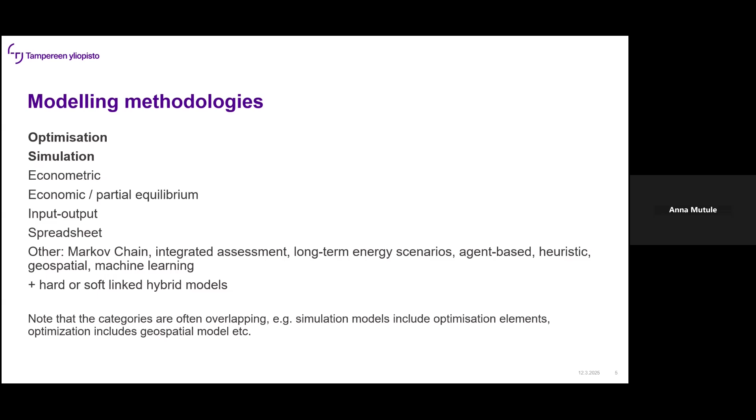If we look at energy system modeling from the purpose perspective, optimization models are typically used to explore a range of scenarios. Their purpose is to present possible system evolution without estimating likelihood. Those models can also take a normative approach, meaning they define systems that can only be achieved through specific actions, essentially seeking a target state.

On the other hand, simulation models are commonly applied in forecasting. Their role is primarily predictive, aiming to represent how the system behaves under given conditions.

Explorative scenarios explore what may happen by analyzing multiple possible futures. Normative scenarios define what future we want, focusing on desirable outcomes and gaps to be bridged. And predictive scenarios estimate what future we expect, including a range from best case to worst case outcomes.

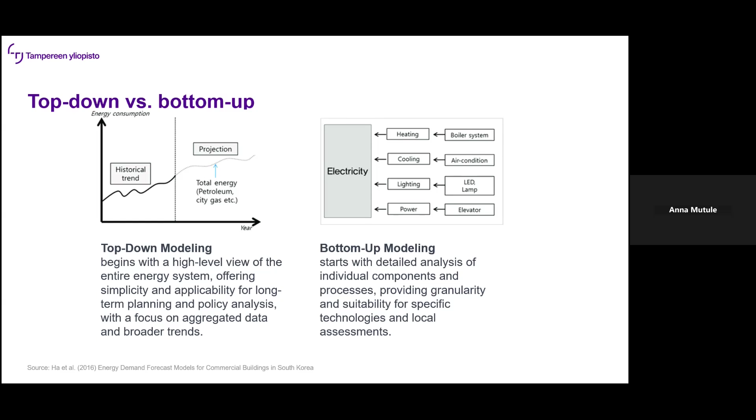On the other hand, bottom-up modeling starts from a more detailed perspective, analyzing individual components and processes. It provides a higher level of granularity and understanding, making it more suitable for evaluating specific technologies or conducting local assessments. This approach considers detailed factors such as heating systems, air conditioning, and lighting to provide precise energy demand estimations. The choice between top-down and bottom-up modeling depends on the objective of the study.

Those subsystems interact to balance energy demand and supply across different sectors. Energy consumption and generation are influenced by various end user sectors, including industry, transport, buildings, and also renewable resources such as wind or solar. Each sector has specific processes and dynamics, such as industrial processes, transport mobility, and the hydrological cycle, for instance hydropower. This approach highlights the importance of cross-sectoral modeling to achieve a holistic understanding of the energy system and improve decision-making for sustainable energy transition. So it is important to cover various sectors in energy modeling.

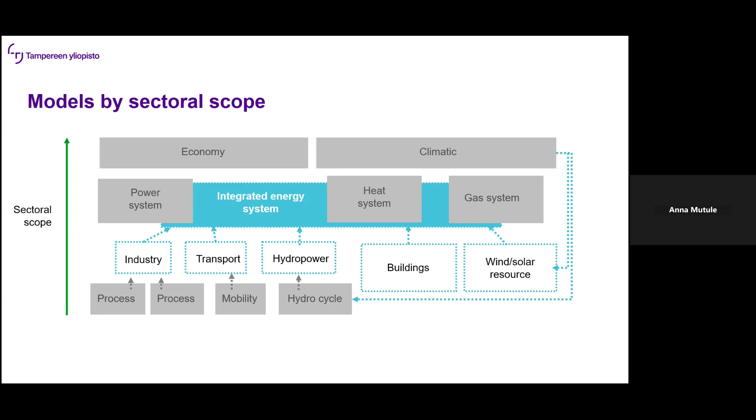In an integrated energy system, the key challenge is to continuously balance supply and demand in real time. This requires a coordinated approach across multiple energy sectors, infrastructure, and consumption sectors.

A critical aspect of this process is the cost-optimal dispatch of generation units. This involves making strategic decisions on the optimal use of energy storage, interconnectors, and demand response mechanisms, while considering technical constraints, market conditions, and regulatory frameworks. Additionally, the planning of the energy system focuses on identifying optimal investment strategies under uncertain future conditions.

With increasing system complexity and sectoral interdependencies, it becomes essential to simultaneously consider multiple energy sectors, ensuring efficient operation and long-term sustainability. By integrating different energy carriers, such as electricity, heat, and gas, along with various generation techniques, storage solutions, and demand side measures, optimization models enable decision makers to develop resilient, cost-effective, and sustainable energy systems.

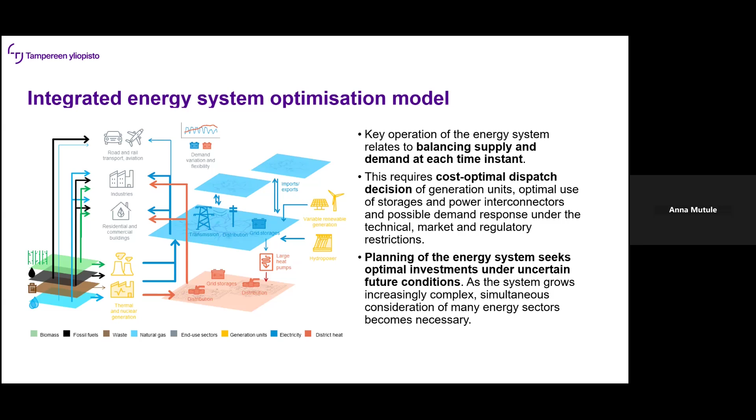More detailed spatial resolution helps capture transmission constraints, regional variations in resources, and infrastructure dependencies. The level of techno-economic detail also varies. Simpler models may use linear aggregation to represent power plants, while more advanced models incorporate dynamic startup cost, efficiency variation, and storage interaction. High resolution in this domain improves the accuracy of economic and technical feasibility assessment.

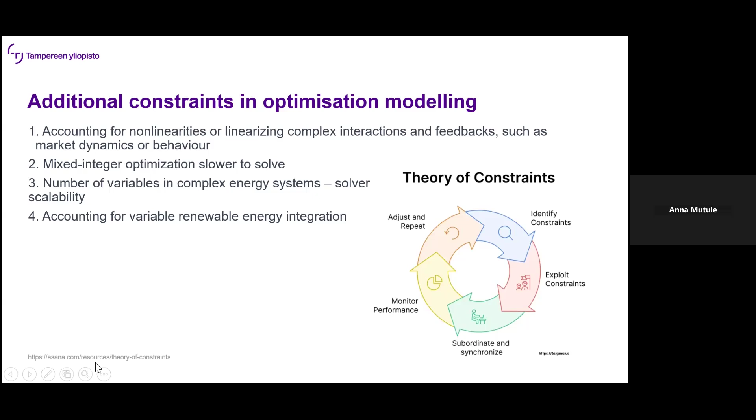Just to summarize the difference between optimization and simulation models: optimization models are designed to find the optimal solution for a specific objective, for instance cost minimization. They are highly efficient for well-defined problems and can handle large-scale systems, even under uncertainty. Those models are commonly used for investment planning, dispatch optimization, and infrastructure expansion strategies.

However, there are some limitations. Optimization models rely on assumptions and simplifications, which may not fully capture the complexity of real-world systems. The optimization model's effectiveness is highly sensitive to input data and model parameters.

Simulation models, on the other hand, are used to analyze dynamic system behavior over time. They can represent complex interactions and feedback loops, making them particularly useful for policy impact analysis, behavioral studies, and technological adoption assessment - meaning new technology inclusion in the generation portfolio of a country.

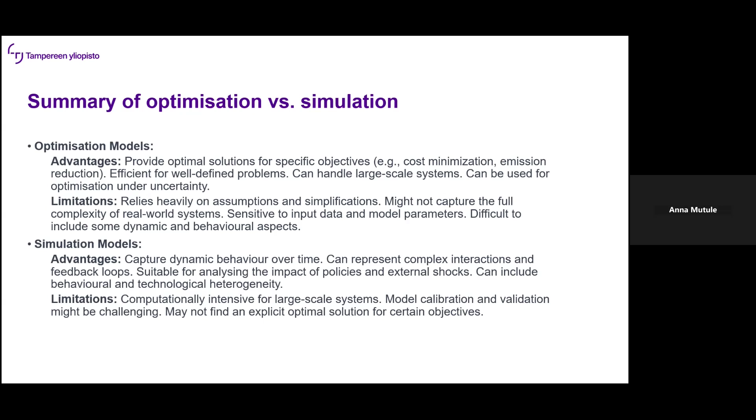However, simulation models can be computationally intensive, especially when applied to large-scale energy systems. Model calibration and validation can also be very challenging to carry out for a simulation model by the end. The choice between those approaches depends on the specific objective of the study, the data available, and the computational resources at hand.

With advancements in computing technologies and the evolving needs of various stakeholders, a wide range of modeling tools have been developed to analyze energy flows, evaluate technology adoption, assess policy impact, and so on. In the following slides, we will introduce key energy system modeling tools and highlight their core functionalities and applications.

I will start with the tools for large-scale power system planning. I also need to mention that those tools are commercial, but at the same time widely used to optimize operation, expansion, and market interaction.

For instance, the Plexos tool is used by the European Commission, by the Joint Research Centre of the European Commission, and they rely heavily on this tool. Going into details, Plexos is an advanced energy market simulation and optimization software developed by Energy Exemplar in 1999. It is used for system planning and operational optimization across electricity, gas, and water sectors.

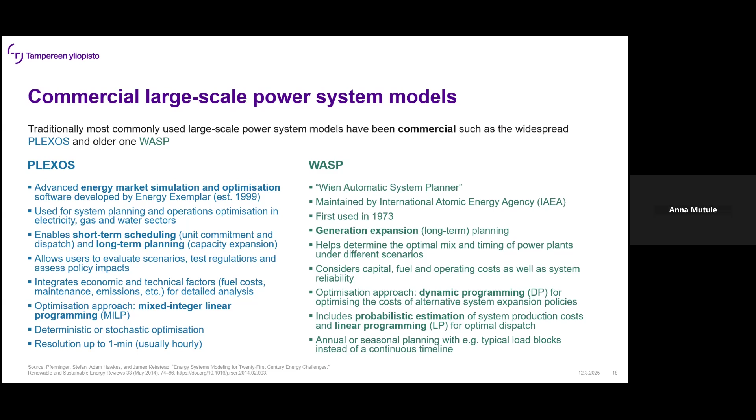But as you know, it's not a new approach, it's already been around for some time, and it's been advertised, let's say, by the European Commission. Energy system modeling is a very complex process with many stakeholders involved, and it's a multidisciplinary approach.

That's why sometimes it's even easier to use a kind of open approach. In recent years, there has been a growing trend towards openness and transparency in energy modeling. Open source tools and open data contribute to improving scientific quality by enhancing transparency and collaboration.

This shift is helping researchers, policymakers, and industry professionals develop more accessible energy models. One key initiative in this movement is the Open Energy Modelling Initiative, which fosters an active community, including an online forum where experts discuss methodologies and share insights, results, and other ideas. If you are really interested in energy system modeling, I suggest you join this community.

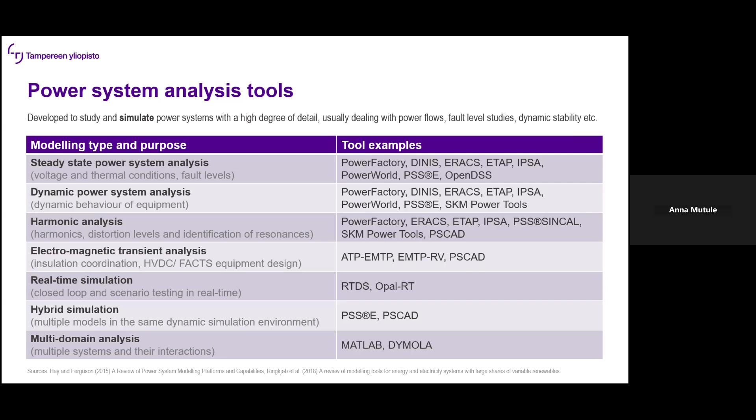Okay, this is all from my side. Sorry for my voice.

Then, Henrik, I give the floor to you to start the video for the SpineOpt model. The first is a very short introduction from the web page of the MOPO project, and another is a more detailed explanation of SpineOpt. Thank you very much.

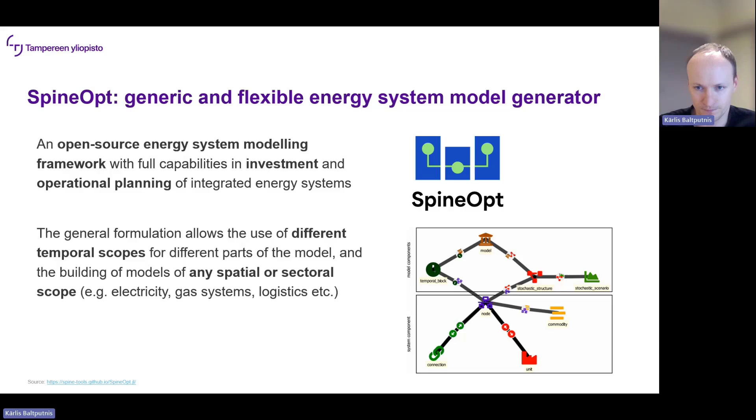The inception of SpineOpt stems from the need to overcome limitations in traditional energy modeling tools. Between 2017 and 2021, the European Union's Horizon 2020 program funded the SPINE project, laying the groundwork for SpineOpt. This initiative emphasized creating open source tools that promote flexibility and integration across various energy sectors.

Building upon this foundation, the MOPO project was launched to enhance SpineOpt's capabilities further. The currently ongoing MOPO focuses on developing repeatable and configurable data pipelines, which streamline data management processes and improve the overall user experience, making the tool more accessible to a broader range of users.

SpineOpt offers several significant advantages. First, flexibility in modeling. It accommodates complex systems with diverse technologies and interactions, allowing for detailed representations of real-world scenarios.

Second, thanks to the adaptable temporal and spatial resolution, users can customize their models to specific research questions or policy analyses by adjusting temporal, spatial, or even stochastic structures as necessary.

Integration across sectors is another strength, wherein SpineOpt enables the modeling of multiple sectors, such as electricity, heating, and transport within a single model, facilitating comprehensive analysis of sector coupling strategies.

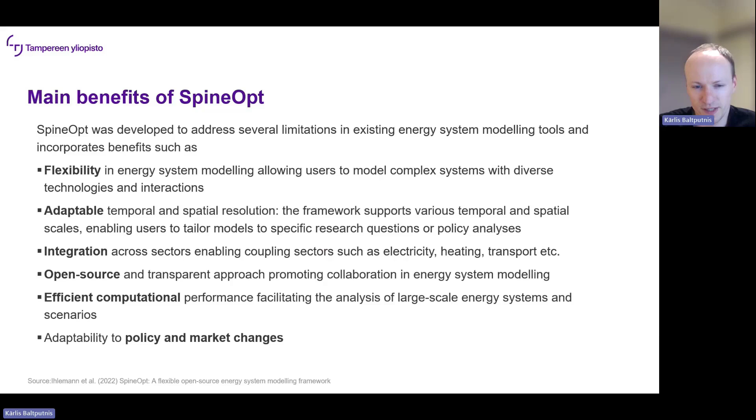And finally, adaptability to policy and market changes, meaning that the framework's flexibility allows its users to quickly adapt to evolving policy frameworks and market conditions, ensuring that analyses can remain relevant in ever-changing regulatory environments.

SpineOpt's unique architecture enables several key features, such as solving the investment master problem with operational subproblems. This hierarchical structure allows for the simultaneous consideration of long-term investment decisions and short-term operational strategies, ensuring cohesive planning.

Then the priorly mentioned flexible temporal and stochastic structures, wherein the framework supports various temporal resolutions and can incorporate stochastic considerations, enabling robust scenario analyses that account for uncertainties in factors like renewable energy production, demand fluctuations, and other non-deterministic factors.

And another key quality of SpineOpt is that it can represent different energy carriers, their conversion technologies, as well as energy storage options, providing a holistic view of the energy landscape.

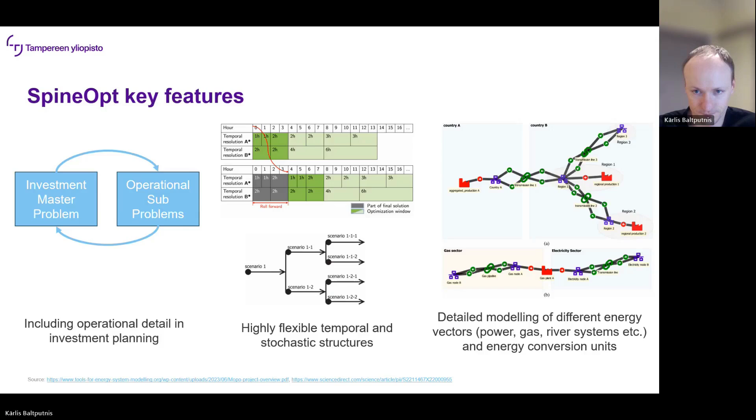At the core of SpineOpt is an objective function designed to minimize total system costs. This comprehensive function includes various cost components which are relevant for the investment planning and/or operational optimization problems.

The investment costs are expenses related to building new infrastructure, such as power plants, transmission lines, or storage facilities. Fixed and variable operation and maintenance costs are ongoing expenses required to keep the energy system operational, including routine maintenance and operational activities.

Then fuel costs are expenditures on fuel sources necessary for energy production. For combustion units, these are often enough the main cost component, which makes up the marginal cost of a generation unit.

Then startup and shutdown costs are associated with initiating or halting the operation of energy units, which can be significant in systems with variable renewable energy sources, forcing thermal units to operate more flexibly.

There are a number of other cost components that make up the objective function, but for instance, renewable curtailment costs, which are penalties or costs incurred when renewable energy generation exceeds demand or system capacity, leading to wasted potential, and others, which can be read up more in the online documentation.

It is important to note that the objective function as well as the constraints are dynamically formulated during model execution, tailoring to the specific structure and parameters of the model. So, depending on the information provided, SpineOpt solves the problem using linear programming or mixed integer linear programming, ensuring computational efficiency and accuracy.

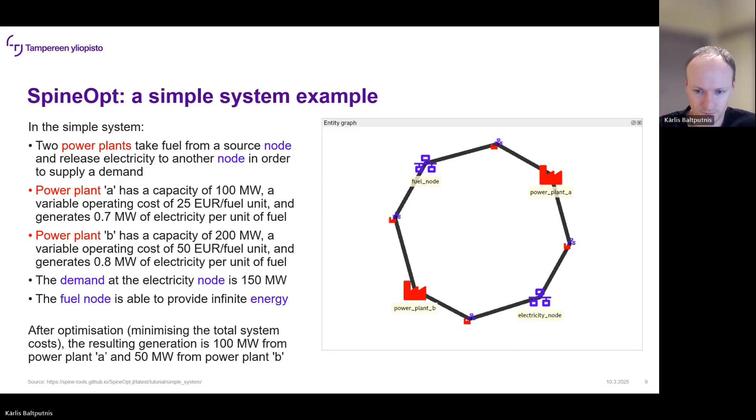In terms of inequality constraints, we have the flow of electricity from the units being between 0 and the respective maximum capacity, and the equality constraint is the nodal balance in the electricity node, wherein the injection to it from the power plants must be equal to demand. In other words, to the withdrawal from it.

By solving this optimization problem, SpineOpt determines that the cost-minimizing solution is to operate power plant A at its full capacity of 100 megawatt in this hour, and power plant B at 50 megawatt. This allocation meets the total demand of 150 megawatt at the lowest possible operational cost.

This also makes sense intuitively, as power plant A altogether provides cheaper power, but its capacity is insufficient to meet the whole demand. This example showcases SpineOpt's ability to model and optimize energy systems. Despite its simplicity, the model captures essential aspects of operational planning, including capacity limitations, efficiency rates, and cost minimization.

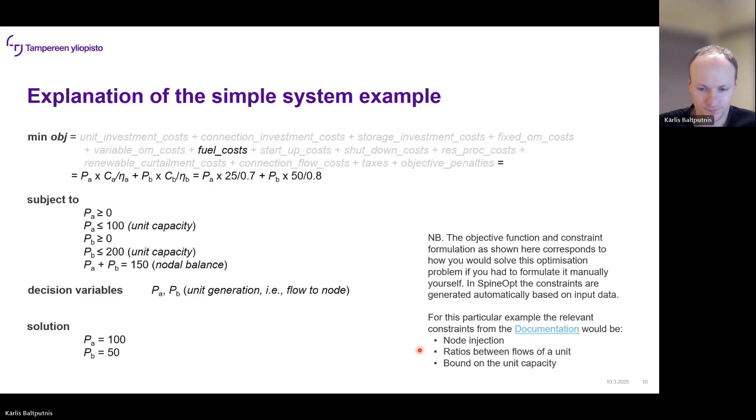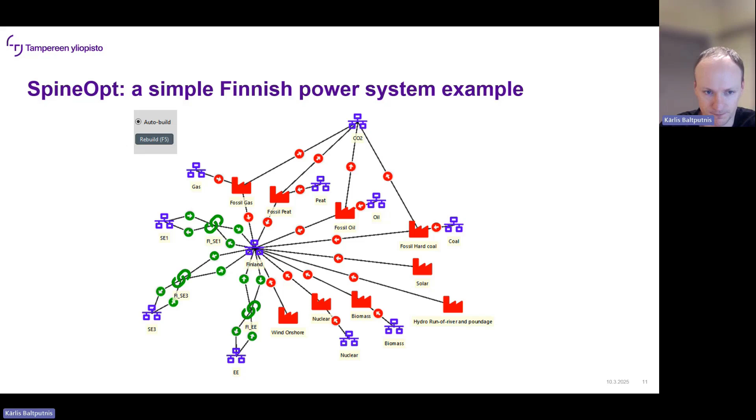Now, let us pay some attention to the tools that facilitate working with SpineOpt models. Spine Toolbox is an open-source Python package designed to manage data, scenarios, and workflows for modeling and simulation in energy systems. It serves as a centralized platform where users can integrate various data sources, pre-processing tools, models, and post-processing analyses into a cohesive workflow. This integration facilitates seamless data handling and model execution, reducing the complexity often associated with managing multiple tools and datasets.

One of the key features of Spine Toolbox is its ability to link data pre- and post-processing tools with multiple models developed in languages such as Python, GAMS, and Julia. This flexibility allows users to incorporate different modeling approaches and tools into their workflows, enhancing the adaptability and robustness of their analyses.

Additionally, Spine Toolbox supports parallel execution, enabling users to run multiple models, simulations, or scenarios simultaneously, thereby improving computational efficiency and reducing time required for extensive analyses. This capability is particularly beneficial when dealing with large-scale energy system models that require significant computational resources.